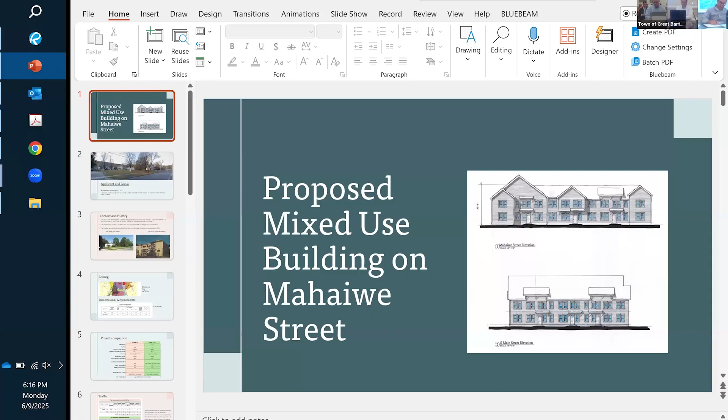Good evening, for the record my name is Jim Felice. I'm a civil engineer with SK Design Group. I'm here tonight for the project at 546 Mahaiwe Street. Yeah, good, you got it, looking at the screen.

So what we have is a proposed mixed-use building. This slide also shows our updated architecture. As Kate laid out, we spent some time with the design advisory committee and also went to the planning board. At each step along the way we received comments, and the bulk of them were related to architecture and the aesthetic of the project. So we made an attempt, between the design advisory committee and the site plan review meeting, to improve our architecture—it was lacking in some regard. That's when we hired Bradley Architects and revamped our approach to the architecture.

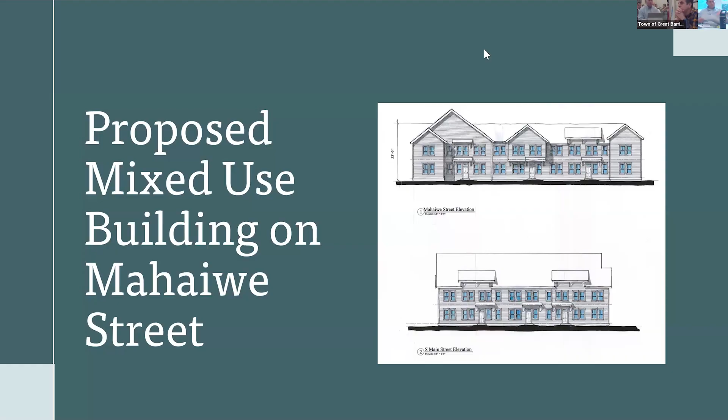Consistently through this entire project, we have not really had to make a change to the civil engineering side of things, so I think one of the key things relevant tonight is the stormwater. That design hasn't changed. Actually, the amount of impervious area has gone down slightly, and we've maintained the same stormwater system rather than change it. We just left it a little oversized.

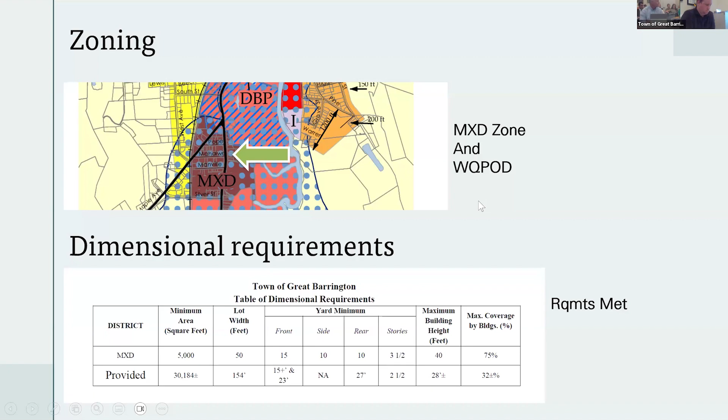An important issue—I wasn't here for all the meetings back then, but there was a large sugar maple tree along Mahaiwe Street. That building on the approval was about 10 feet from the property line, right where the tree is. With some good architecture and site design work, we now have a 23-foot setback, which is generally consistent with the drip line of the tree, minimizing impact on it.

Sewer and water is public in both cases. There was a fair amount of correspondence back in 2019 about sewer, and a need for a device called—I think it's a muffin grinder—a sewage grinding device to make sure there wasn't clogging of the sewer in that area. That is included in our application, so we didn't have to go back through that review process.

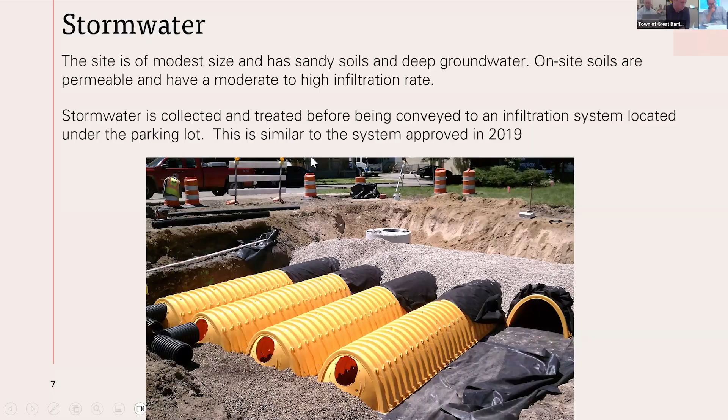We've got seven street trees proposed along the property line frontage of the two streets. We believe this will create the type of landscaping outlined in the bylaw. We've outlined the size of the trees and the types to be native species, consistent with species we've observed up and down this section of Main Street.

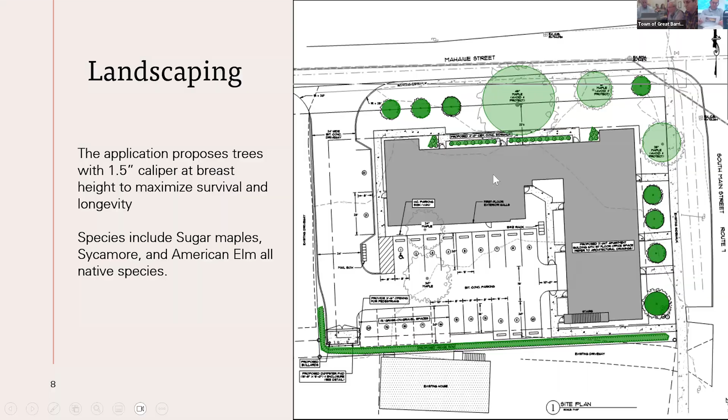So that kind of summarizes the approach. I didn't spend time on the multifamily approach or use at this site because it's now by right. At town meeting last year, the MXD zone allows multifamily by right, but if you have questions or comments about that, we can discuss it.

The project will create 21 apartments and an office. The apartments are being offered at market rate, long-term rental rates, walking distance to downtown. Traffic flow and parking have been designed to move in a safe and efficient manner. We believe with frontage on two existing public ways that we have sufficient circulation and access around the proposed building. The MXD zone allows this use by right.

The property was previously developed, so it's technically a redevelopment site, although we've taken no consideration for that - we've designed it as if it were a new site. But I believe it being a vacant, underutilized site in town makes it ripe for development. The project will potentially have a positive impact on tax base. So thank you, and I have all the design drawings here.

One thing I didn't mention, but I want to jump back to, is lighting. This will be discussed at length with the planning board, but this map actually has very small numbers on it. If you notice, there are zeros all along the property lines, and that's a foot candle measurement that shows there won't be light spillage onto the neighboring properties.

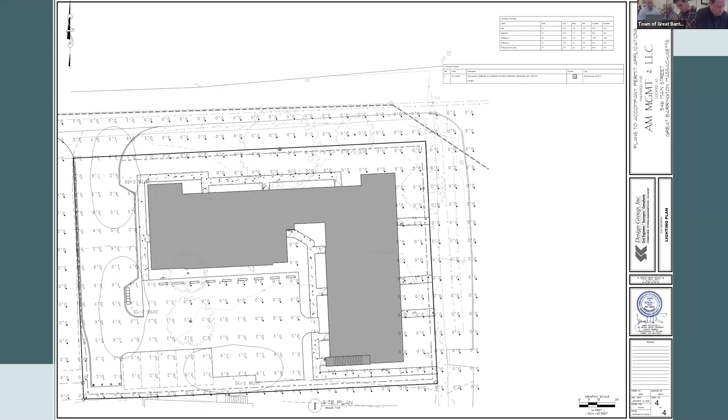And then there was just a ton of work done on architecture. This project has been maturing as it relates to this topic over several months, and we believe we've come a long way with this building fitting on that location and really having what we believe to be somewhat of a front facade on both streets. So thank you.

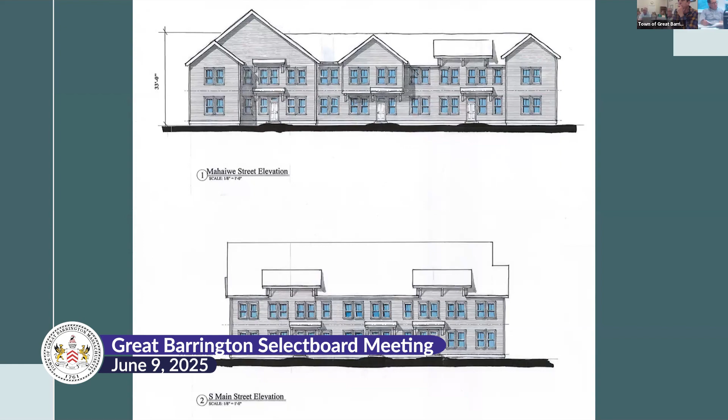So related to that, who is responsible for maintaining that? I asked a question with respect to the town's enforcement and the building inspector, and with respect to the apartment site, what entity is on the hook for actually performing the repairs if they come up? The property owner - the stormwater management standards, set forth generally under the Wetlands Protection Act, are by reference required to be followed as part of this process. There's a lot of case law and regulation behind that standard and policy, and that policy requires by law that the owner is responsible. Now, you could shore that up further by making that a condition of this permit.

I'm not gonna respond to that, but just as a practical matter - I'm not a civil engineer - but things can go wrong with that. I assume it's a well-designed system, but if things go wrong, either from foreseen events like leaves or unforeseen events, whatever they may be, I'm just wondering who is really on the hook for performing those repairs, and what does the town do? What do the residents do if those repairs are not made in a reasonable amount of time?

I honestly haven't had that situation yet. I don't know.

And in a similar enforcement theme - again, it's not part of the water discussion - but at the southern portion of the property, there's a long shrub that's being put in the plans, to cover the entire border there, the property line. And on one end, it's also blocking the dumpster. So that's probably a key element that's making the apartment complex fit in to a certain extent aesthetically. That's debatable, but so who enforces, who for the town is responsible for inspecting and enforcing that shrub borderline?

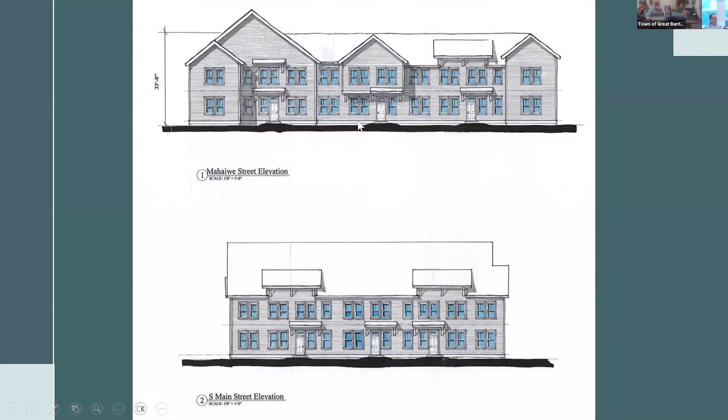Okay, thank you. And again, away from the water issue, just stepping back - if things all proceed well with respect to the permitting for the planning board and the select board, do you have a schedule in terms of beginning work on the building? When would you start work? Just being mindful of the fact that there are other projects in town, completely unrelated to your project, where there've been permits in existence and things have just sort of sat there for quite a while.

Yeah, I would expect that it would take 3 months probably to put together. The drawings that we've presented as part of this application, particularly as it relates to architecture, are 2 to 3 months away from construction drawings, which I would need to apply for a building permit. So you have a 3-month lead time usually, and in that same time period, in parallel, you work on things like financing and that sort of thing. So I would expect that this fall you break ground, and then a year hence you'd have the project built.

So a normal permit, as I understand it, is in existence for 2 years. If we approve that permit, then they have a 2-year window to begin work on the project - is that an accurate way to look at it? I believe special permits are valid for 3 years. 3 years, I'm sorry.

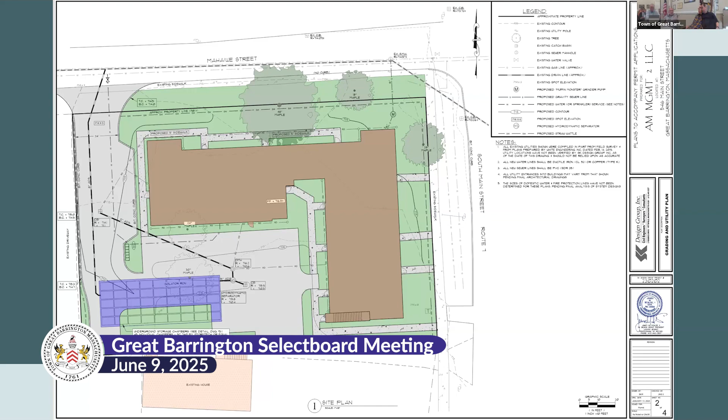What do you feel prepared to do? I guess I feel semi-prepared to vote, but I think the order of things, the way the meeting's laid out, it only makes sense to wait until after the planning board, whether we're discussing site and the water overlay. I just feel like this should have been the last step of the process personally, but that's up for debate.

And the planning board is going to do site plan review, and they're not going to do anything with the water quality overlay district now, correct, Chris? The planning board site plan review also does include a review of stormwater. Whether the project requires a water quality special permit or not, that is always a criteria for the site plan review.

So the planning board did review the previous plan, looked at the stormwater, the parking, the trees, and made comments on the architecture as well. Typically what the planning board will do is first use its site plan review criteria to help guide its own discussion and guide its recommendations to the special permit granting authority. So that's what the planning board did back in February or March, and made a recommendation on the special permit.

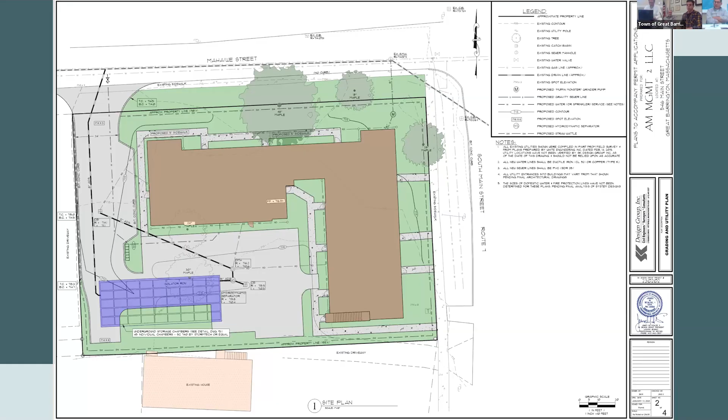So do I have a motion? Does someone want to make a recommendation? Eric, yes, I make a motion that we continue the public hearing until Monday, June 23rd, 2025 at 6 p.m. at Town Hall in Great Barrington. Second. Discussion.

Just to echo what Phil was saying, I think a lot of very valid points were raised by the residents of the neighborhood tonight, and I think it's a little outside the purview of what we're looking at, but obviously it does matter. I encourage everyone to go to the planning board on Thursday, and then we'll get it back. Part of the problem is if this is by right, they should still go and give their opinions. It makes it a little more difficult because it's not a special permit by the planning board, but I agree with you.

Roll call: Phil, aye. Ben, aye. Aaron, aye. It's unanimous. Thank you.

Thank you. Thank you very much. So this one, I'm gonna step out. Oh, yeah, if you're gonna do that, I think it's... feel bad. Yes.